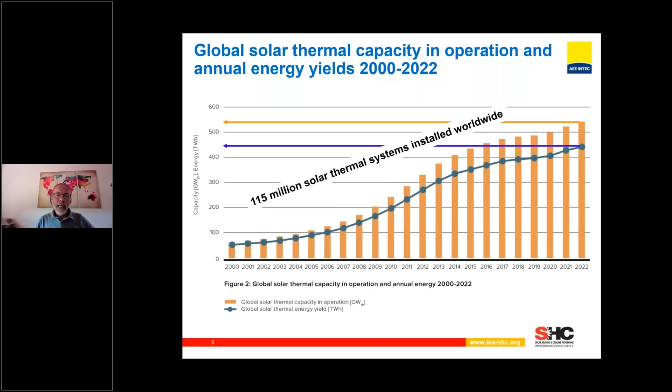I should mention here, solar heating is the only sector which really takes the lifetime of systems into account. So we deduct old systems again, and just in comparison to PV or wind, at least to my knowledge, we are the only ones who deduct the old systems. So the systems I presented just now are really in operation.

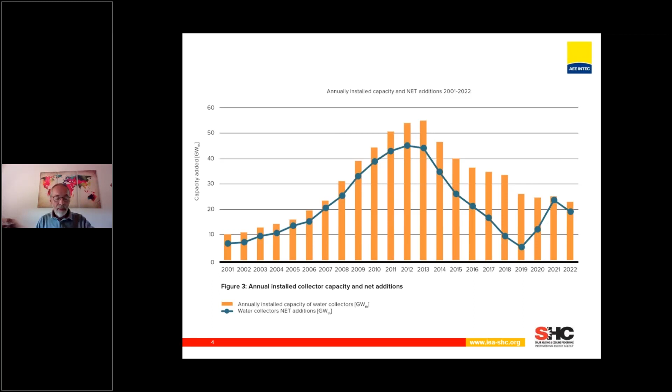The annual installed capacity and net additions you can see on this slide. And as you can see, starting with 2012, 2013, the annual installations unfortunately went down. And we had an increase again from 2020, 2021. As it looks, at first glance, in general we had a quite good market growth, particularly in Europe. But as you might also know, if you are from the sector, we have one really dominating market, which is China.

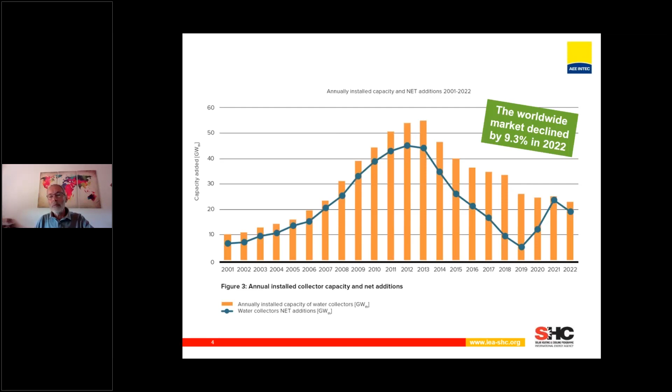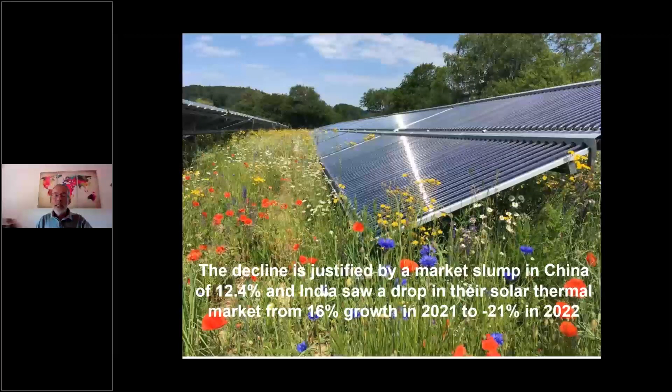China, unfortunately, had a significant decrease, and also India last year. Therefore, the worldwide market decreased by 9.3% in the last year. The decline is justified by a market slump in China of 12.4%, and India saw a significant drop from 16% growth last year to minus 21% in 2022. So this is basically why we have a worldwide trend going down.

This is based on preliminary data based on the data we received. We have not yet received all countries here, so there's some uncertainty, but it looks quite good for European countries. And as I said, worldwide, it's basically the impact of China and India that brought it down.

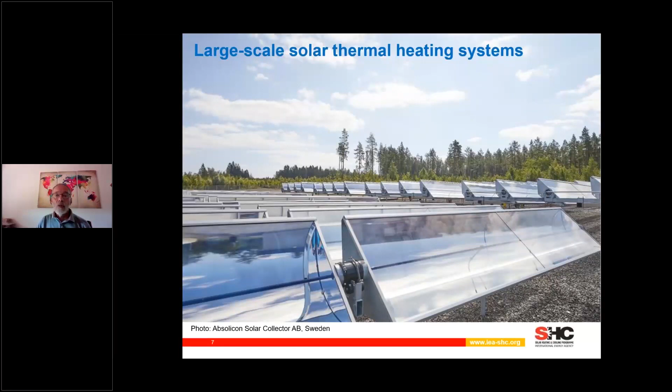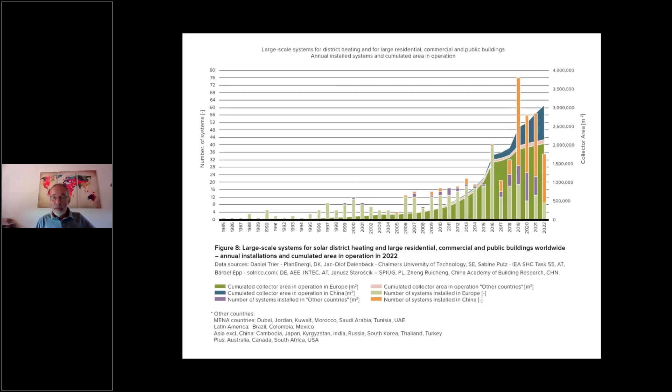Large-scale solar thermal heating systems play a major role for years already. You can see here the development of these large-scale systems, which includes not only solar district heating, but also other large-scale systems bigger than 500 square meters, installations over 350 kilowatts. As you can see from this slide, over the long term, large-scale systems were dominated especially by Europe or European countries. And in 2019, China took over the lead in terms of the number of large-scale systems installed per year. You can see this in the bars - China is indicated here in orange, and the European systems are in green. This is a significant change, and it's ongoing.

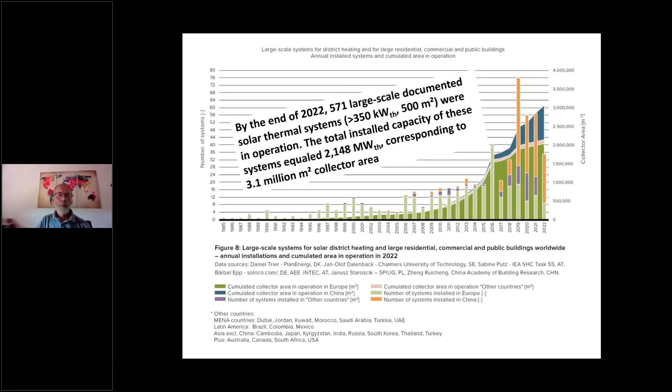Up to now, by end of 2022, we have 571 large-scale systems documented, which is an equivalent of 2.1 gigawatt installed capacity, corresponding to 3.1 million square meters of collector area.

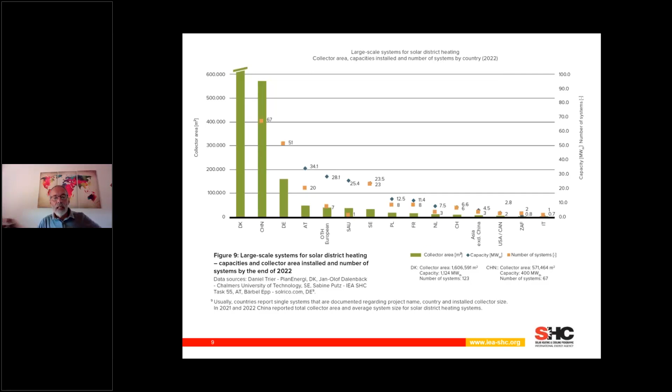A specific part of these large-scale systems are solar district heating systems, and as you can see on this figure, Denmark is leading in terms of number of systems and also the size of systems. This bar really goes to the second floor, so it's cut off at the top. Denmark alone has an installed capacity of 1.1 gigawatt, with about 123 systems installed. But number 2 is China with 67 systems. Then you have Germany, Austria, other European countries, Saudi Arabia, and so forth. But the top 3 are Denmark, China, and Germany.

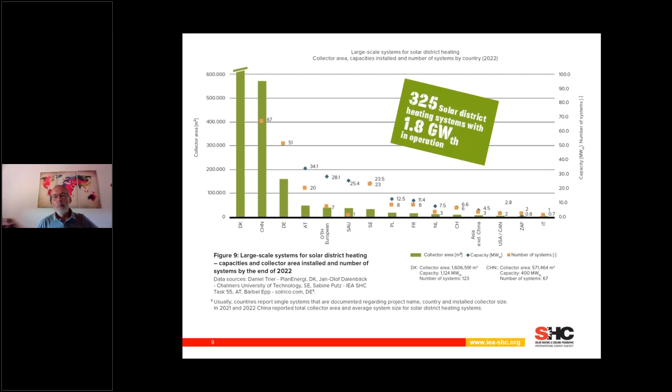In total, we have detailed information on 325 solar district heating systems with 1.8 gigawatt installed capacity. A highlight in the year 2022 - sorry for the typo, it's not 2020, it was 2022 - China reported the installation of 170,000 square meters of collector area in district heating systems, and another 25 large-scale systems with an average of close to 7,000 square meters per plant. And in Germany, 8 systems for solar district heating were installed with a total collector area of close to 45,000 square meters.

And this is interesting - in Germany, there are about 50 systems installed already.

And 2022 was really a record year for solar district heating in Germany. It's not just these 8 systems newly installed, but also 9 systems in a very advanced stage; some of them are already under construction or in an advanced planning stage. And in preparation, there are about 66 systems with a total collector area of 450,000 square meters. So it looks optimistic for the upcoming years.

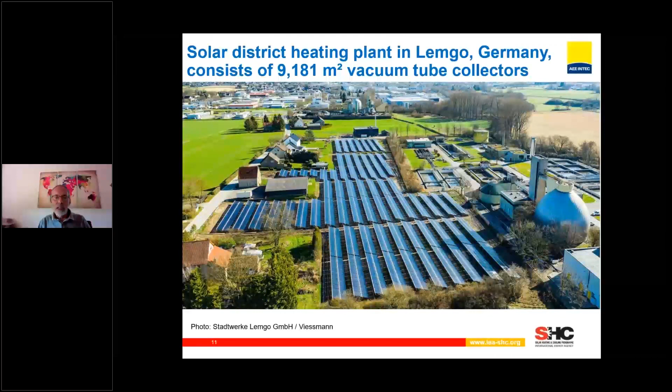This is just one of the solar district heating plants in Germany, in Lemgo. It consists of 9,000 square meters of vacuum tube collectors. It's just to show one of the nice pictures of these large-scale systems for district heating in Germany.

SHIP systems. I will not go very much into detail on solar heat for industrial processes because Bärbel will focus more on the SHIP systems. We now have close to 1,100 SHIP systems in our database. It's about 1.2 million square meters of collector area, so about 856 megawatts in operation worldwide.

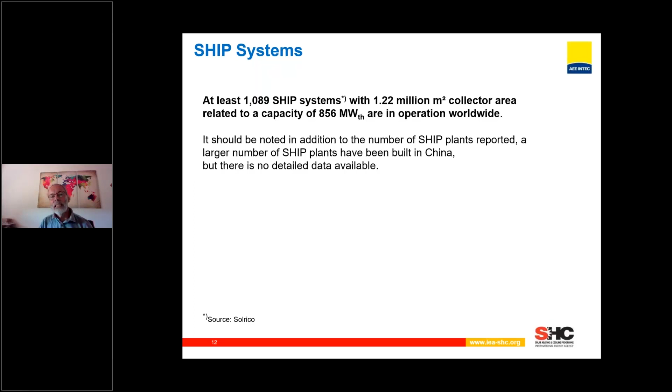I want to mention here that with district heating, we think we have really covered all the district heating systems worldwide because they are known in the countries, so it's relatively easy to get them into our statistics. For SHIP systems it is significantly harder to collect all the systems worldwide. For instance, China always reports a number of systems, but we don't get detailed data for these systems. So therefore, at least 1,100 systems. Most probably there are quite a number more of these systems in operation that we just don't have in our statistics.

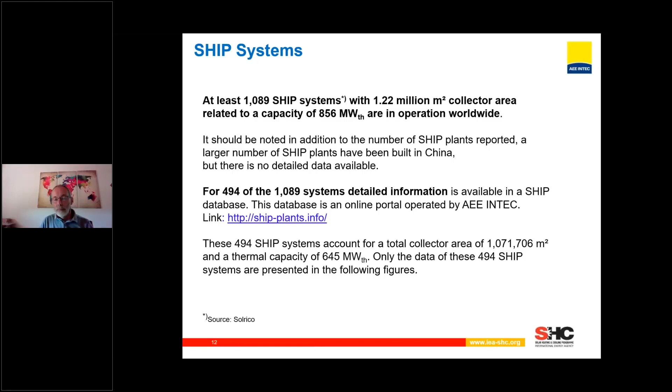Out of these 1,100 systems, for close to 500 systems we have detailed information available in our database, which we are running here at AEE INTEC in our institute. You have the link here. So if you're interested in detailed information on these SHIP systems, just follow this link, ship-plants.info, and then you know where the applications are, how big the systems are, in which countries. So you get a lot of information on these close to 500 systems, and a good overview of the sizes, the collector types used and the sectors where they are applied.

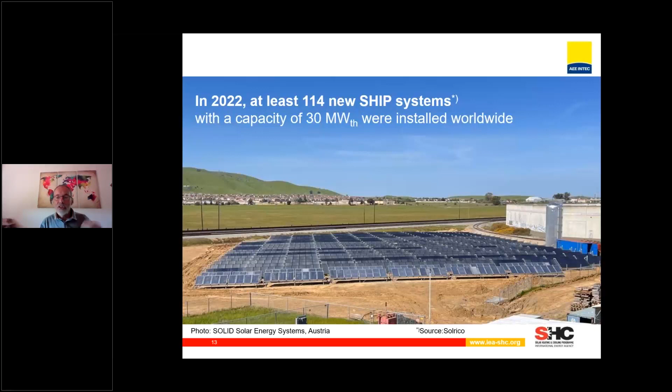Just one picture of the systems installed in 2022. In 2022, at least 114 new plants were installed. Bärbel will present more of this afterwards. And this is one of the systems installed in the United States last year: Ball Corporation, headquartered in Fairfield, California. They use flat plate collectors with 2.8 megawatts installed capacity, and this plant provides heat for washing beverage aluminum cans. It's just to give you one example of the many systems installed.

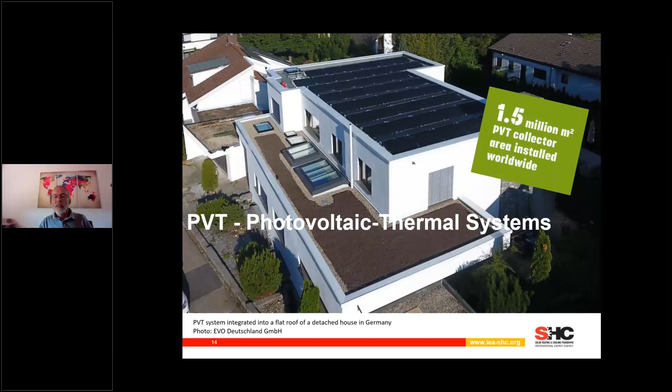Coming to PVT, photovoltaic thermal systems, this was really a success story in the last years. About 1.5 million square meters of PVT collectors are installed worldwide accumulated. And if you look at the PVT markets up to now, you can see this combination of producing heat and electricity in one collector unit is mainly in Europe with 62%, then Asia without China with 21%, and China accounts for 10% of the installed capacity. Then we have the MENA region, Middle East and North Africa, about 4%, and others 3%.

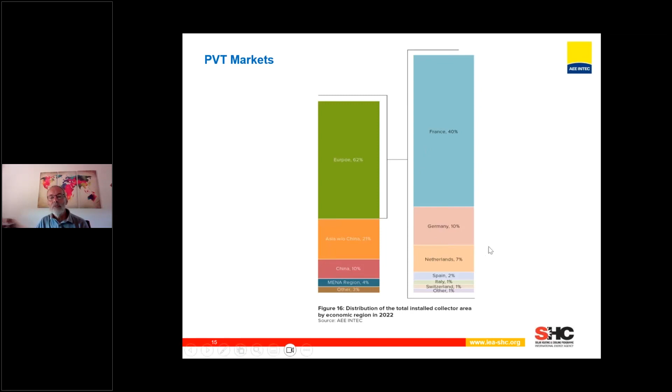If you look to Europe, France is by far dominating the European market with 40%, followed by Germany with 10% and the Netherlands with 7%. And we had quite a good increase of about 9% annually until 2021. Unfortunately, in 2022 this really changed. The global PVT market shrank by 52%, mainly due to France, the biggest market worldwide, which really collapsed with a reduction of minus 90%, mainly due to changes in the subsidy scheme. Another factor was that many companies producing PVT and also PV alone had such big demand that they mainly focused on PV production instead of PVT.

We also had a significant reduction of the market in the Netherlands, with 43%, but also very positive market developments in smaller markets, like Italy with 4 times the market compared to 2021, so 414%, Germany 126%, Switzerland plus 103%, and Spain plus 52%. So we have a very mixed market development here. And I want to show just one final slide on PVT collectors. If you look at 2021 on the left-hand side of this bar, you can see that in 2022 the market changed completely.

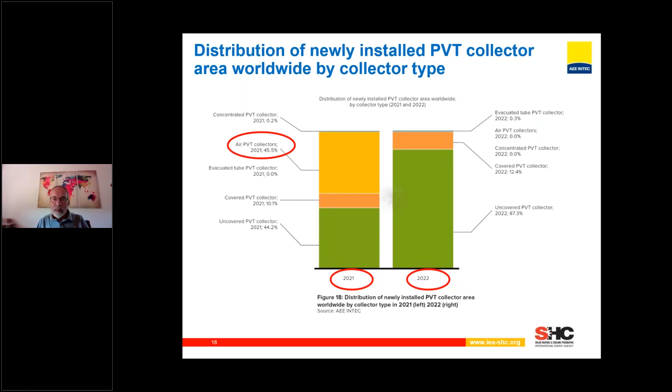So in 2021, PVT air collectors were 45% of the total market. And this PVT air collector disappeared completely from the market in 2022. And this is mainly the impact of France, where they had this change in the subsidy scheme, and the air PVT systems really disappeared from the market last year.

Quickly, an outlook to 2023 or the current year and beyond. There's really a very good outlook, very positive outlook on solar thermal heating and cooling. We can see an increased demand in solar district heating. So it's not just in one country, what we had years ago. In Denmark, there was a booming market, and the other countries came up step by step. Now we have an increased demand in solar district heating in a number of countries.

And in my point of view, this is a very cost-effective way to make urban district heating systems CO2 neutral. And we have shown already in large-scale systems like in Denmark that this heat can be produced for a cost of 20 to 50 euro per megawatt hour. And this is really where solar heat is really competitive compared to gas or coal-fired district heating plants.

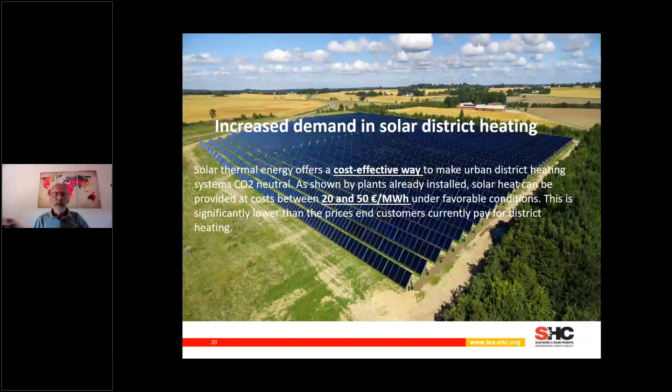And just as a remark, even if there's a lot of discussion of electrifying the heat sector, this will not be done by just electrifying the heat sector using hopefully renewable electricity and heat pumps. As you know, 50% of the final energy demand, and this did not change over the last 15 years, is heating and cooling. And this will not be done in the next decade with just electrifying the heating sector. So there's a huge potential for solar district heating, and this can be seen now in an increased demand.

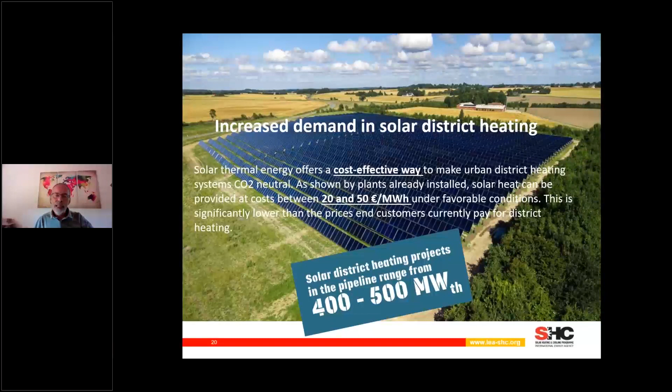So in the pipeline, what we know, is solar district heating for the next years in the range of 400 to 500 megawatt. Just to mention a few of them. In Germany, 9 solar district heating systems, as I mentioned already before, are under construction or in the advanced planning stage. Another 66 are under concrete discussion.

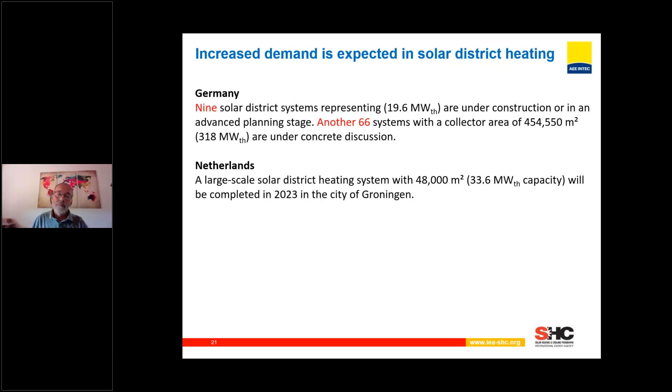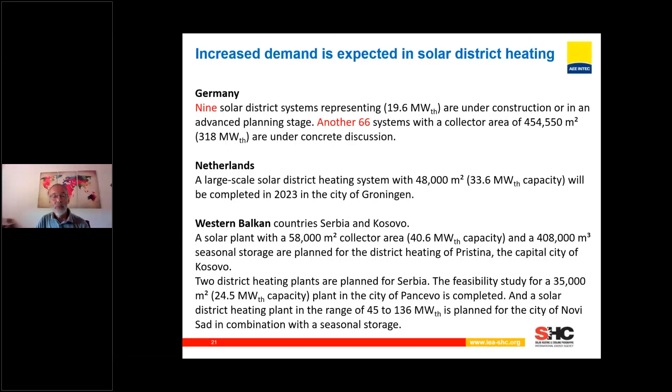In the Netherlands, a large-scale system of 48,000 square meters, so 33 megawatt, is more or less in the stage of completion in Groningen. Then also in the Western Balkan countries, in Serbia and Kosovo, there are big plants, as you can see here, with 58,000 square meters and a 408,000 cubic meter seasonal storage, in an advanced stage already for the district heating system in Pristina, capital city of Kosovo, and another 2 district heating plants are planned for Serbia, also large-scale systems, 24 megawatt, and the other one even bigger.

There's also a new dimension opening up in China, the Handan Bay Water World Resort. It's nearly finished in the construction. It's a 114,000 square meter parabolic trough collector system, so close to an 80 megawatt system, under construction or nearly complete.

Also, there's a very positive outlook for SHIP plants. Bärbel will mention more on this, and it's also information from Bärbel. So there are planned for 2023 about a 7-fold increase of the plants installed. So that's really a positive outlook.

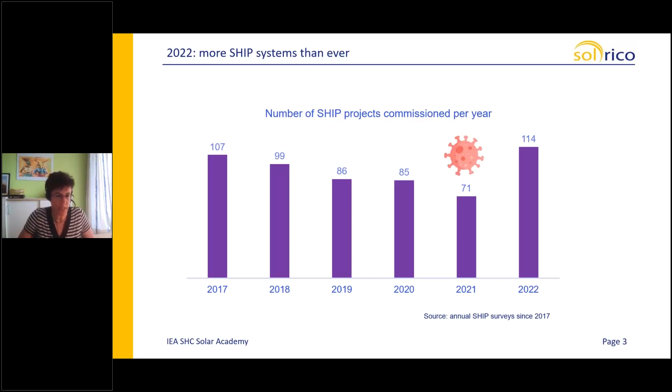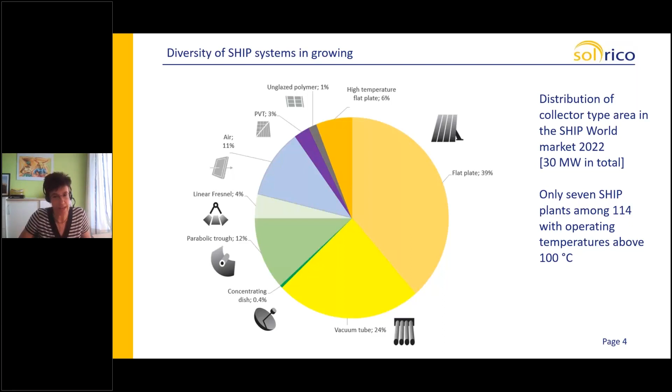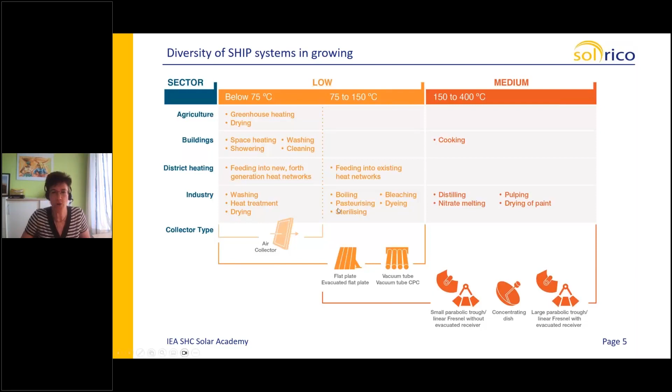Current and future driving factors. I have listed some important ones from my point of view. Well, the first one was obviously the gas shortage in Europe and the peaking energy prices in 2022, which woke up a lot of the industry people. We have also a good funding situation in some European markets. To name here are Austria, France, Netherlands, Germany, and Spain, but also the United States are coming up.

I would like to mention Austria here particularly because they started a subsidy program 2 years ago, where they also grant feasibility studies for projects above 5,000 square meters. And this had a big success. In the meantime, we have 13 feasibility studies in their pipeline, and the average of the SHIP systems is 15 megawatt. And if you compare this to the only 3 SHIP plants that we have in operation in Europe at the moment, which range between 7 and 11 megawatt, this is a huge success.

We will also probably hear more about the US, not only because the supply chain for SHIP systems increased a lot in the US, I will come to this point later, but also they have allocated again a big budget for renewable heat in general, not only SHIP, of $4 billion US, again tax credits, which were in place already previously. And we will talk to the project developers there to find out the effects that will have. This is very new information, I think still from May.

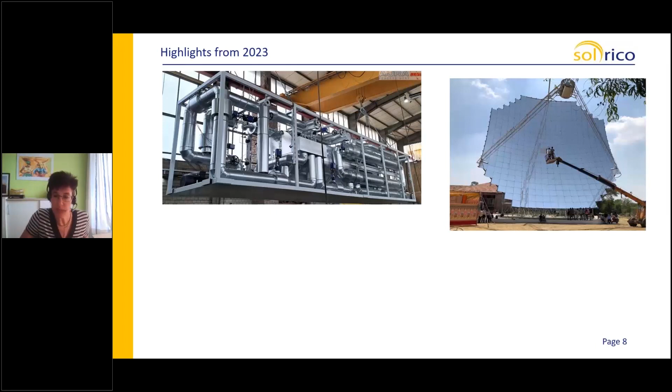Another milestone was this large dish developed by an Australian company, Sunray CSP, built up in India with 450 square meters. It's a double-tracked system producing direct steam at fairly high efficiencies, and has a reasonably small ground footprint. And well, let's see whether they succeed to get more of these installed in the near future.

And another milestone is the big plant that we have seen under construction in Spain for the Heineken factory in Sevilla. It's an ESCO project, in which the Spanish subsidiary of the utility ENGIE will provide the heat. The solar field is installed by Azteq. It consists of parabolic troughs the size of CSP plants, and it will deliver 210 degrees to the factory of Sevilla. And it must be installed in a record short time because the subsidies force the project developers to finish by September.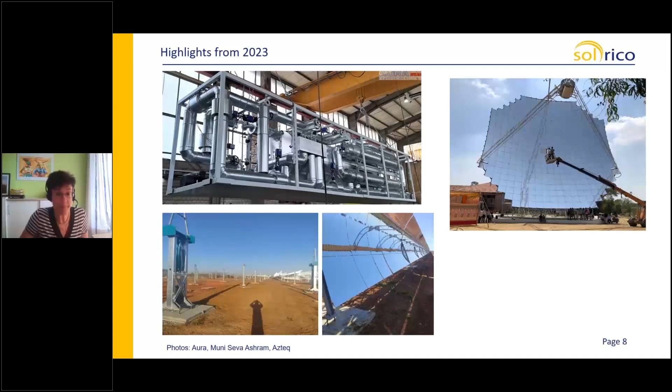NewHeat will talk about their milestone themselves, I suppose, Nicolas. They are just about to commission this 10.5 megawatt plant in France, which he will probably explain to us in detail in his presentation. So what was special this year for the first time in our survey is that we wanted to have this crystal ball. We wanted to see what the future brings in terms of SHIP. And we had a bit of funding from Natural Resources Canada. A big thank you to them on this point.

So we have asked the project developers to give us not only their 2022 projects, but also contracted projects and projects under development. And 21 project developers from around the world followed this request, and a big thank you to them. Against NDAs, they gave us the information, also some detailed information about the projects they plan. So we have them from Austria, Belgium, Canada, France, Germany, India, Israel, Mexico, Netherlands, Spain, Sweden, Switzerland and USA. This was where the companies came from.

And they reported altogether 51 projects that are upcoming, and we looked into the methodology that Solites used. And Solites was behind the German map that Werner Weiss showed in his presentation on solar district heating. And what they do is, if they get projects in an early planning stage, they give them a realization potential. So, for example, that's how we translated this into the SHIP market, if only a signed LOI or MOU is available for a project, we consider the capacity of this project only at 30% in our forecast.

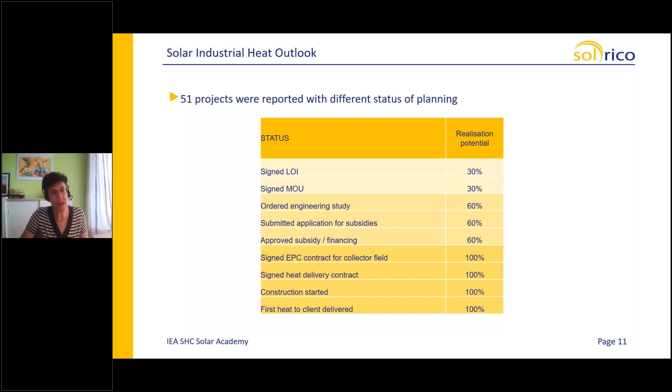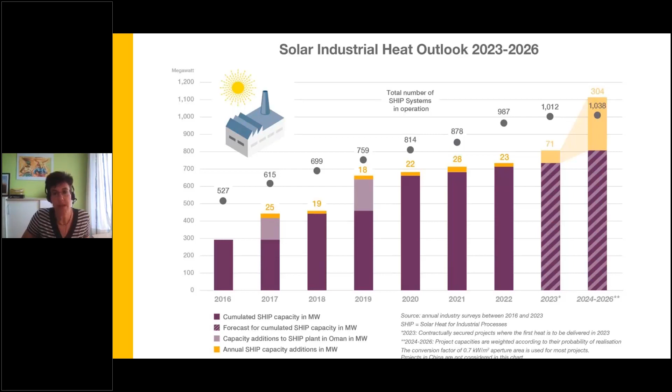And now if you go a step further and you look into projects that are announced for the years 2024 to 2026, and you do this weighted strategy from Solites by only counting 30–60% of the projects, we end up with 304 megawatt that are already announced at this early stage for the next years to come. So I think the SHIP market really has a good potential for growth. If we are very optimistic on how reliable the data is and whether all projects will be realized, then we will even reach another doubling.

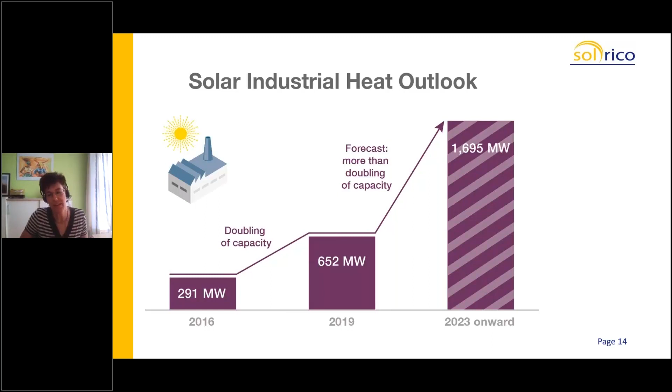So this column here with the 1,695 megawatt, this is if all the projects without reduction and weighted percentage probabilities come true. So you see that we had the first big jump because of the Oman project, a doubling in capacity until 2019, and we will then reach again a doubling in a shorter period of only several years. So altogether good outlooks.

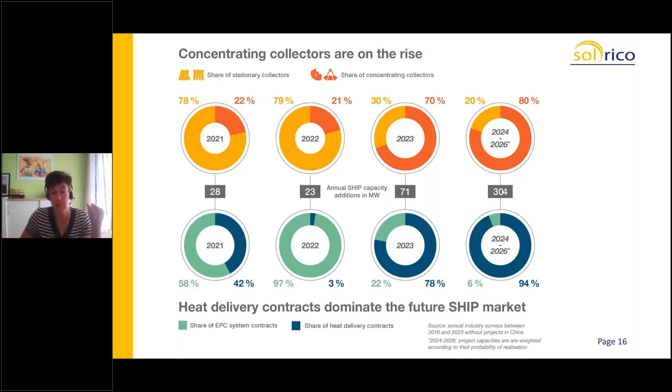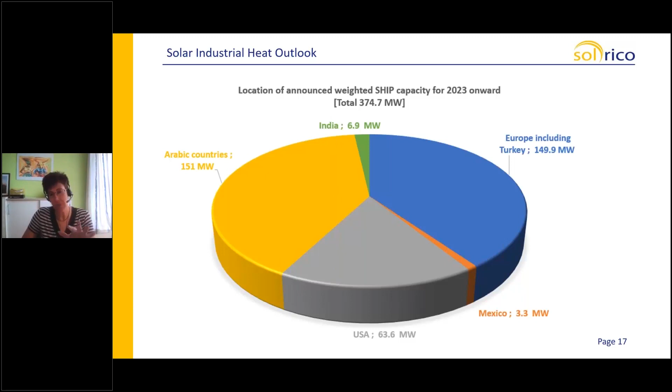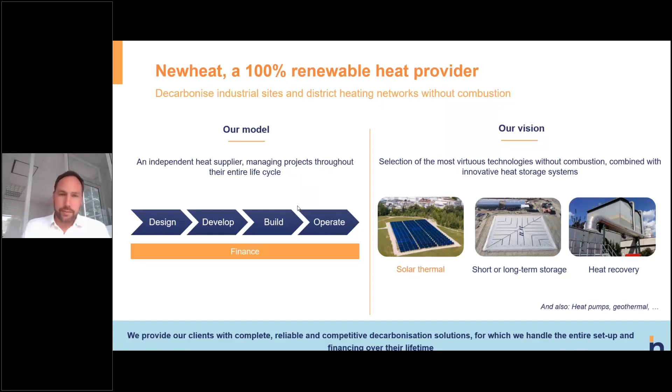What we do for industrial clients is really to understand first the heat requirements. It's key. We're not just a producer of heat. We produce and integrate directly in the process of the client. So it needs a bit of effort, a bit of modelization capacity to ensure that what the client gives us is also what we will provide heat to.

And then, of course, in-house, we design the different requirements and propose a solution. It's really a project-by-project approach. So there's no one size fits all. Yes, we could say it's a solar thermal field with a storage tank, but then there's all the parts on the other side where it's really tailor-made to adapt to the heat requirements of the client.

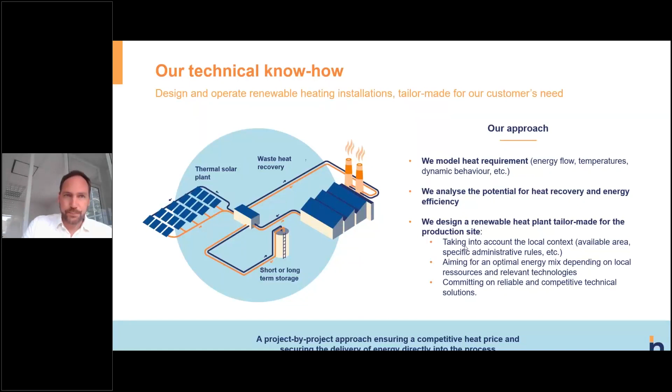So one of the key aspects and one of the key success factors of SHIP and large-scale SHIP is the capacity to provide heat as a service. So in solar thermal today, when you combine it with other renewable heat, thermal storage, heat pumps, heat recovery, you typically get a 7-10 year payback. And so you don't find a lot of industrial clients which are happy to invest on such a long-term return on investment. So we take the risk in-house, we take the technical risk, the financial risk, and the administrative risk for all the development, the permitting, and so on.

And the idea is, against that, we request a commitment from the heat consumer for 15 or 25 years.

Very quickly, we are based today mainly in Bordeaux, with 40 people, 40 of us here in engineering, modeling, construction, and operation, on top of business development. And we have an office in Madrid to develop the Spanish and Portuguese markets. We have a colleague based in Graz for all the district heating networks for Central Eastern Europe. And then we have two more tropical destinations with Sydney, with François Xavier, and Chile with Gustavo, who are both working in this very sunny country with stable economic growth.

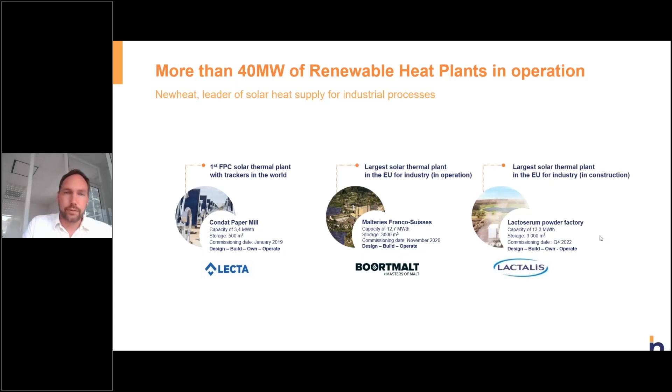It's important to see that each time these projects are very specific and they change from one to the other. The first one, which was commissioned in 2019, was the Condat paper mill from the Lecta group. We have a peak power of 3.4 megawatt thermal with a little storage capacity and the capacity to avoid 1,000 tons of CO2 per year.

It was our first project, quite a complicated one, because we had to rehabilitate an old carbonated sludge storage area. So under the panels you actually have an old sludge deposit that we had to insulate and impermeabilize. And there the role of the plant is to preheat the makeup water for the boiler.

On the financing part or subsidies, it was a grant of above 50% granted by the French energy agency ADEME, and with one specific client, the Condat paper mill.

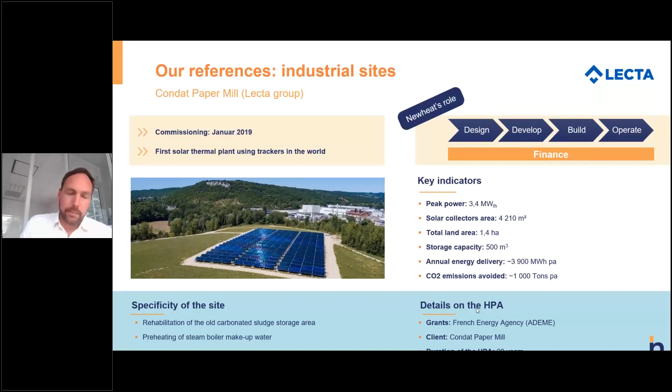Then the second project that I want to present today was commissioned in April 2021. So we have now 2 years of visibility, 2 years of fine-tuning, and 2 years of operating in parallel with a biomass and with a cogeneration plant. For those who have an idea of how to run multiple heat production at the same time, you understand the complexity, and so we're quite proud of achieving the daily operation of this plant in a complex environment.

Here the size of the plant is about 12 megawatts. We run a storage capacity of 3,000 cubic meters, and we avoid 2,000 tons per year of CO2. Again, the French ADEME was one of the grants that was received for that.

And it's one of the only projects today where we had a third-party investor, Kyotherm, and so it's a plant that we don't own but that we have built, that we have designed with our engineering team, and that we operate since.

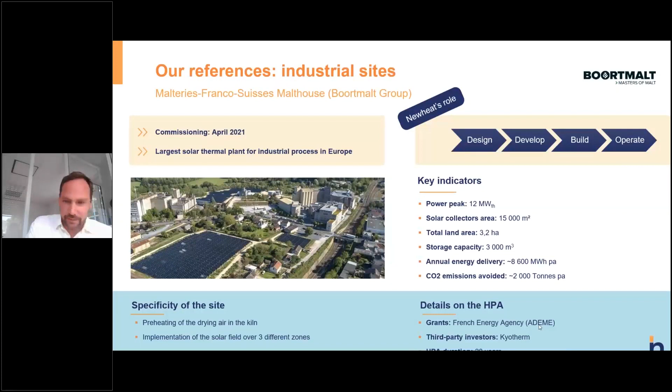I think it's also interesting to see that it's split in 3 areas. It's because the area was a bit crowded, and the land we could gather was a bit split, small and a bit confined.

Finally, the latest project, I'd like to go a bit further to give you more details around what we've made there. This is really the latest, it's our latest child, if we can say. It's providing heat to a milk drying tower for Lactalis.

It's a group which is on this site, the Lactoserum France site. They produce mainly whey powder, and here we are using solar thermal and storage to preheat this heat in the tower directly and inject hot air into the very exigent and critical process, which is this drying tower. As you might know, they're very strict on hygiene and what you get, because half of this product ends up in baby milk or in other food additives.

So this is the largest project that we know of. Maybe in your database you have others, but in Europe we believe it is the largest plant for industrial application in operation currently. There could be some we hear of in the coming year that might dwarf this project, but it's still a very good reference we are very proud of.

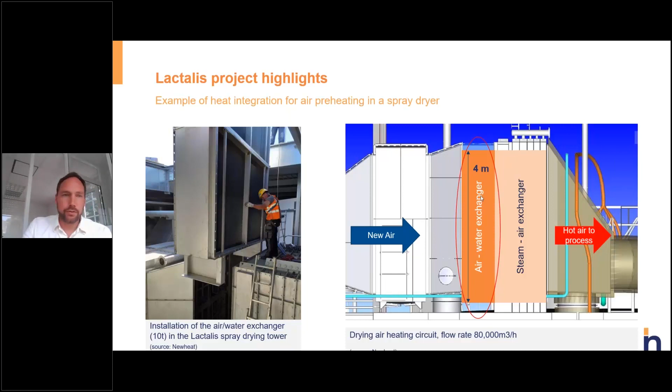There was also a lot of concern around an endangered frog species, which was identified by our environmental study. And so, of course, the area was protected. The site had archaeological interests, and so the state body in charge of that had to investigate and recover some archaeological samples. And in terms of the technicality of the project, I would like to say that it looked like a very difficult project, but step by step, every hurdle was overcome.

At first, we had to cross a railway between the solar plant and the factory. This can add a bit of complexity in terms of drilling under the railway, but also in terms of permanent access to this area, because it's under the rail and you are in the property of the French Railway Authority. There is ATEX regulation because there is some powder that can be in the air, so requirements around explosive areas. And of course, just to facilitate it, there is a high voltage transmission line above the solar field.

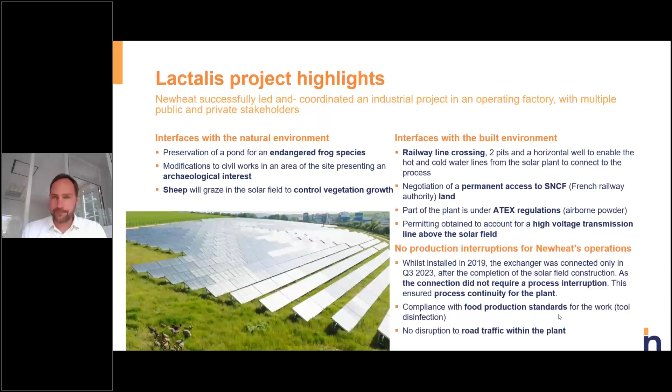Very, very interesting. So thanks for bringing concrete information on existing SHIP systems and business models, how you operate and how you try to address the needs of clients and potential clients. As a side note from our side, we can confirm that the project you referred to, Lactalis in Verdun, is the current largest one in operation. But as you mentioned, and this is not so good news for that one but good news for the additional ones, there will likely be bigger ones coming up soon.

So for us in the sector, that's good news. That's good news. Good news for the sector. For everyone, and yeah. Soon there'll be another one.

Exactly. So it's very interesting that we are under this development, and I have to say, for us it's surprising how fast it's developing, also in terms of the large scale, the size of the systems for industry. We didn't see it coming a few years ago. Just to refer, in Europe, 4 years ago, the largest system had 2 megawatts, before the one that Nicolas presented for the paper mill in France. So the largest one had only 2 megawatts. So that's an interesting development.